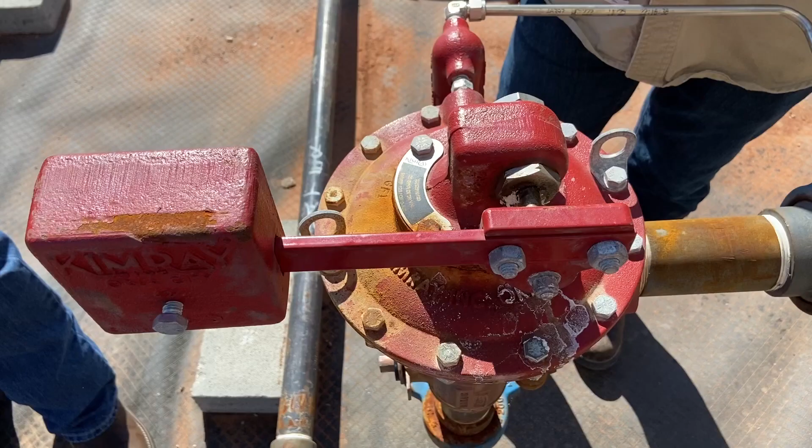The weight-operated dump valve is a product that producers use to control levels in heater-treater vessels. Certain conditions can cause oscillation of the weighted lever, accelerating the progressive wear on the stuffing box seal and allowing a leak to occur. In this video, we're going to show you Kimray's solution to this issue.

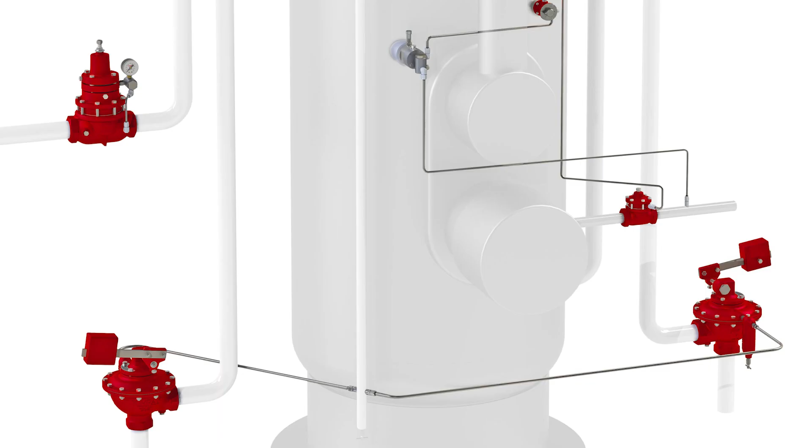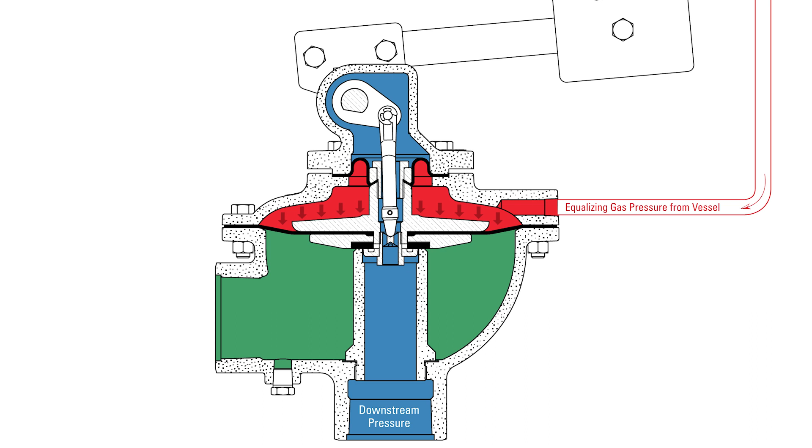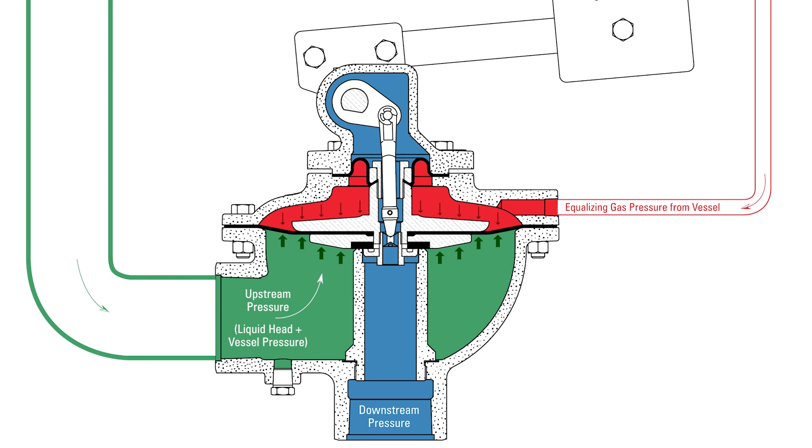Kimray's weight-operated dump valve uses equalizing gas directly from the vessel to balance the valve, which gives it the sensitivity to actuate based on the small pressure changes resulting from the rising liquid head. When this equalizing pressure becomes different than the upstream pressure in the valve, it creates an imbalance of forces on the diaphragm. This can cause oscillation of the trim, which is visible from the outside as an oscillating lever arm. This oscillation over time can lead to premature wear on the shaft and seals, leading to leaks at the stuffing box connection.

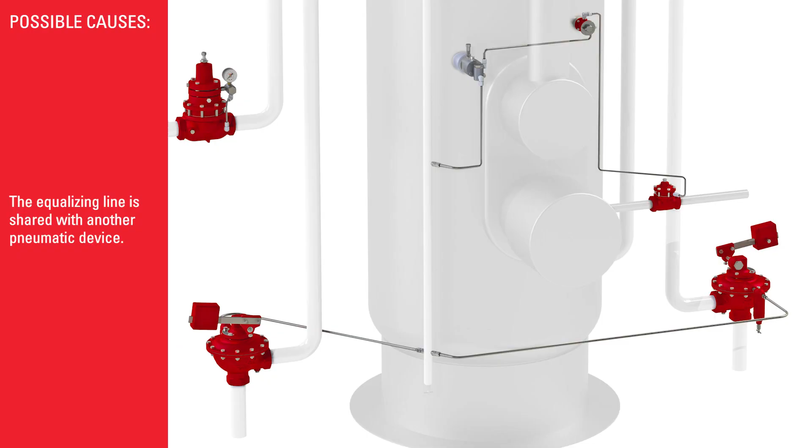There are a few common causes of the imbalance and oscillation. One is when the equalizing line is shared with another pneumatic device. Another cause is condensate collecting and blocking the line due to a dip, or in the drip pot if it's not being drained regularly. A third common cause is an oversized valve.

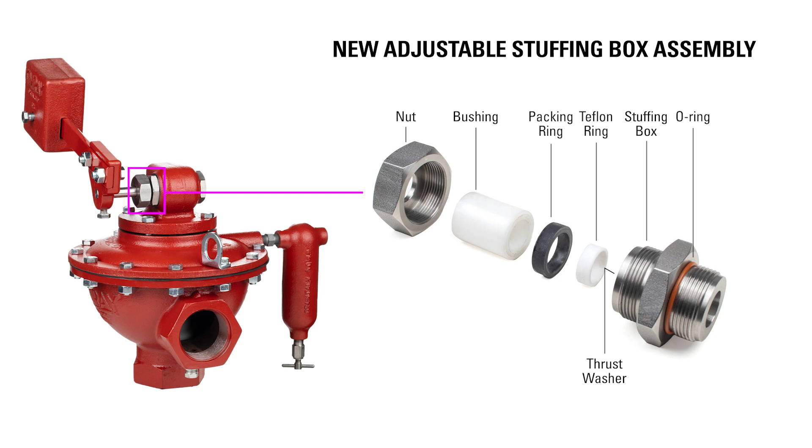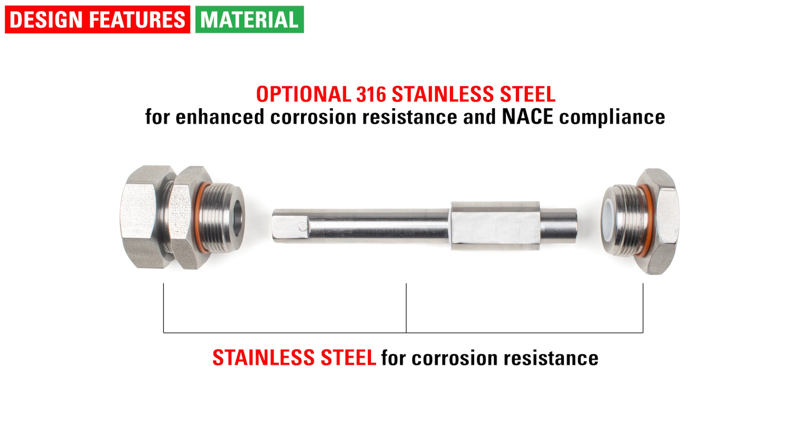Understanding that these conditions can exist in a heater-treater system, Kimray has designed a new adjustable stuffing box to combat the oscillation and leaks. The new design is made of stainless steel for corrosion resistance and is available in optional 316 stainless steel for enhanced corrosion resistance and NACE compliance.

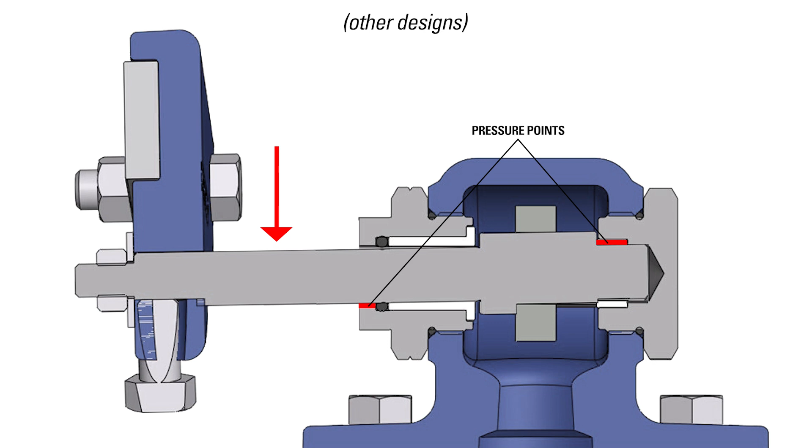The seal, being located between the two supporting bushings, provides strength and stability to the shaft, eliminating any potential angular movement. In other designs, the seal is not between the two bushings, so the weight and dynamic movement of the lever, and unavoidable thickness variation of the bushings, can allow angular movement of the shaft. And of course, there's the adjustability.

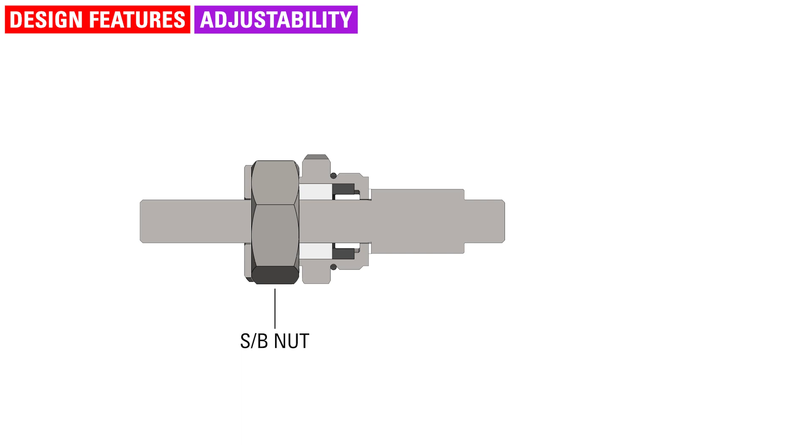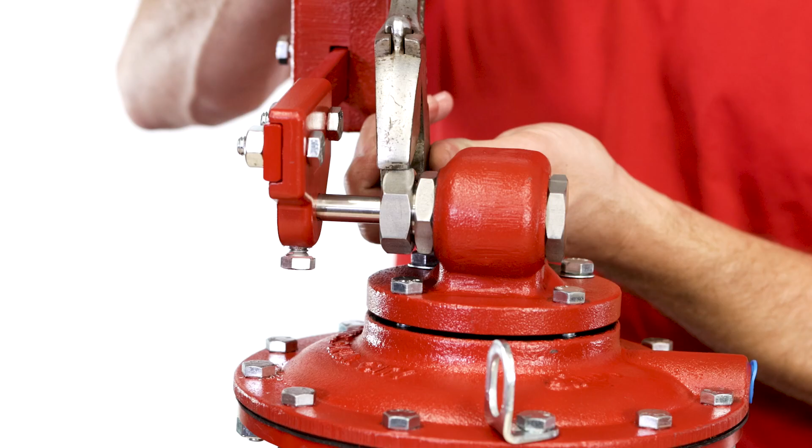By tightening the stuffing box nut, the packing ring is compressed, which tightens the squeeze on the Teflon sleeve, providing a low friction surface to compress and seal around the shaft. If leaks ever do occur, simply tighten the nut until the leak stops. No need to isolate the valve and remove the stuffing box to replace the seal.

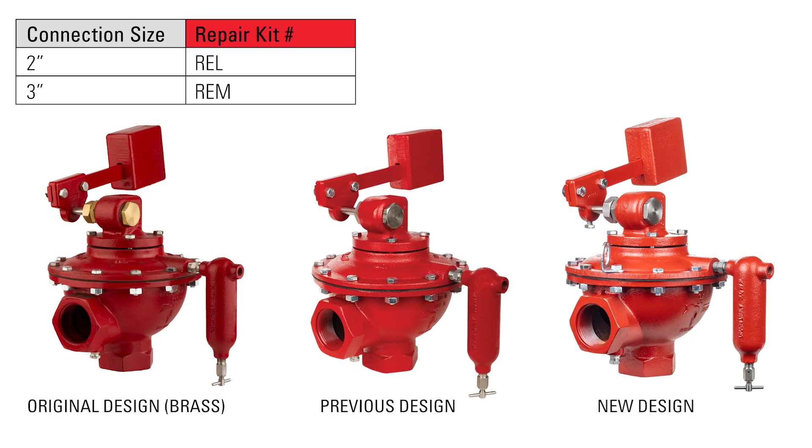This new design is currently being assembled into all new 2-inch and 3-inch weight-operated valves. With the release of the new stuffing box design, repair kits will include components needed for repairs on this version and all previous versions, all in one kit. The kit part numbers will remain the same. Additionally, we offer a conversion kit that can be used to replace any existing stuffing boxes, compatible with all previous versions of the weight-operated dump valve.

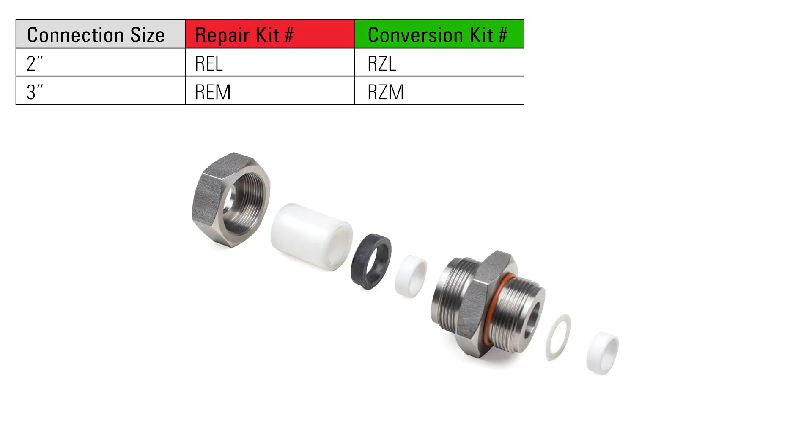Here's how to replace a previous style stuffing box using the conversion kit. Loosen the set screw and remove the lever hub arm assembly. Remove the stuffing box with a wrench.

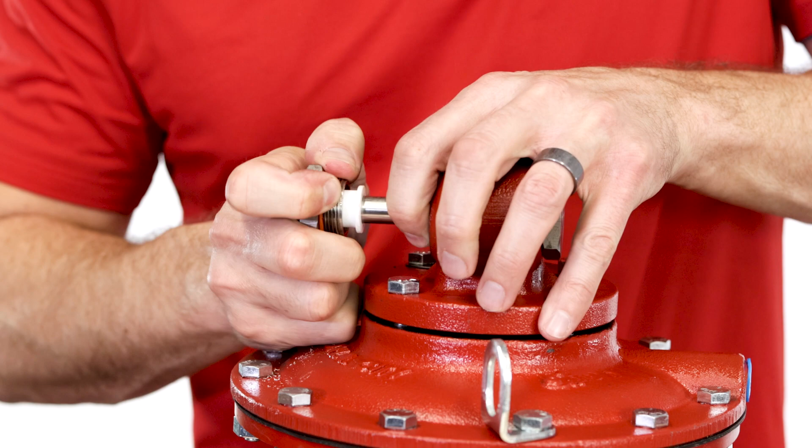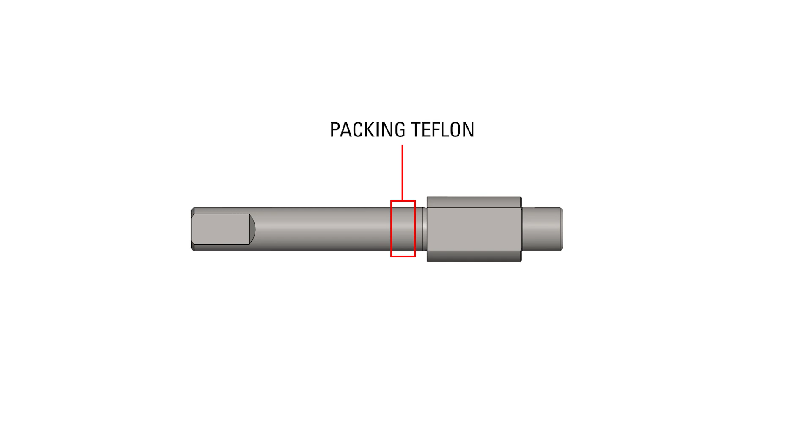Remove the shaft and inspect the critical seal area. This is where the new packing Teflon ring will sit. If the surface finish in this area is rough or there are scratches that could allow a leak path, replace the shaft. Slide the Teflon thrust washer onto the long end of the shaft. The thrust washer is important to reduce the friction between the stuffing box and the shoulder of the shaft. Reinstall the shaft with the flat on the end facing down.

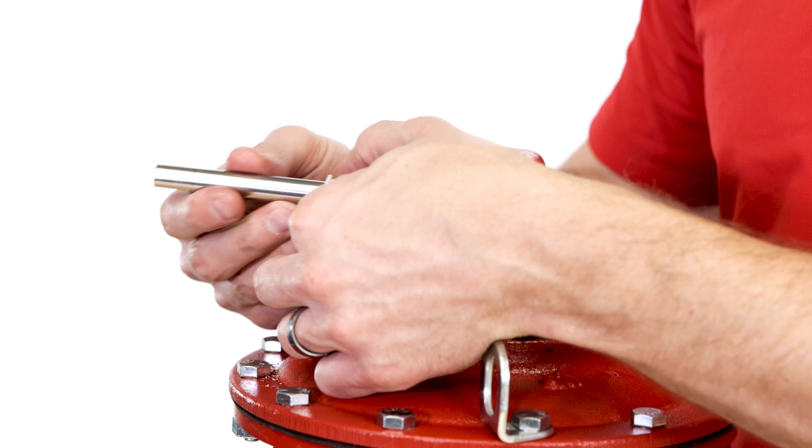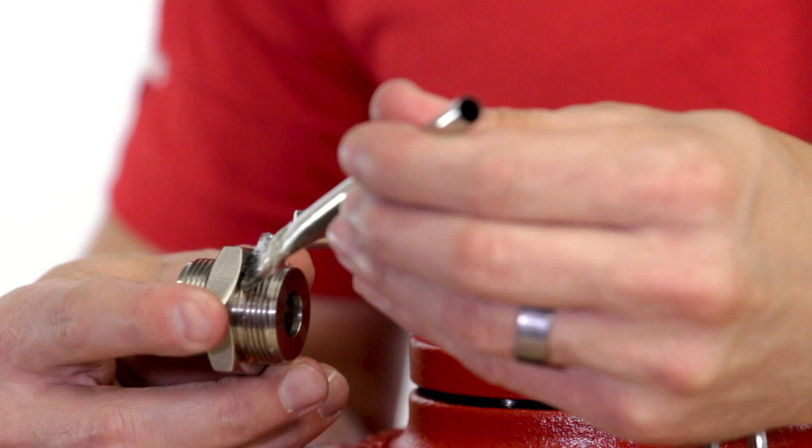On the side of the stuffing box with the smaller inner diameter hole, add grease where the O-ring will sit. Add the O-ring to the same side of the stuffing box and add more grease to the outside of the O-ring. Hand start the side of the stuffing box with the O-ring into the bonnet and tighten with a wrench.

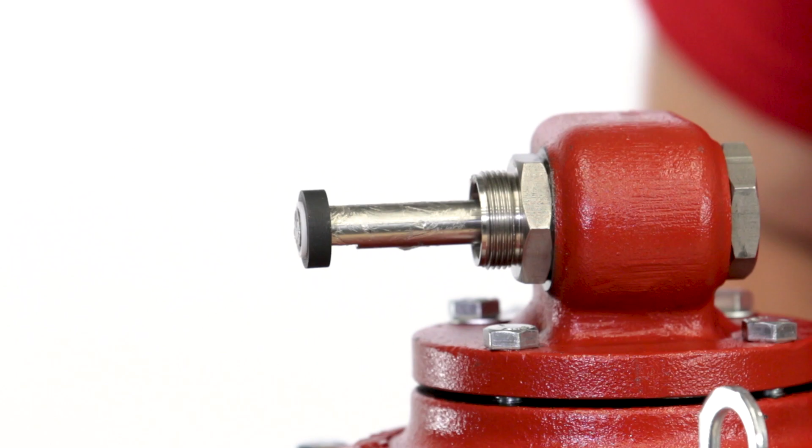Add grease to the shaft. Then slide the Teflon ring onto the shaft, followed by the packing ring. Then use the bushing to push them into the stuffing box. Tighten the adjusting nut onto the stuffing box as tight as you can get it with your hand. Then an extra quarter turn with a wrench.

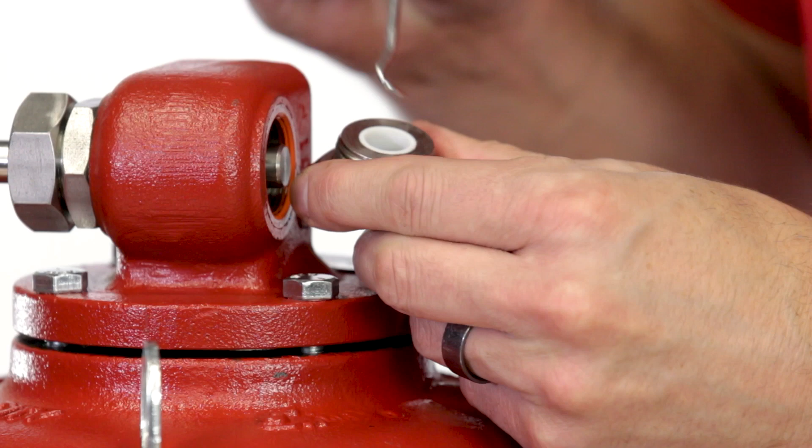Use a wrench to remove the trunnion plug from the other side of the bonnet. Use a pick to remove the Teflon ring and replace it with the new one from the kit. Replace the trunnion plug and fully tighten with a wrench. Put the lever arm back on and tighten the set screw.

After the valve is installed and pressurized, the nut should be tightened further, only as much as needed to stop any leaks, plus an additional 1/8 turn. Over-tightening the nut could hold the shaft too tightly and impede proper operation.